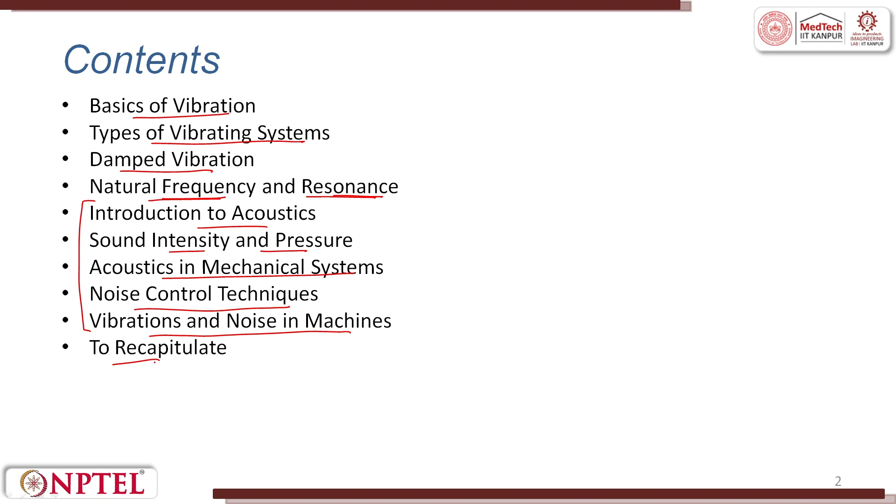First question is, what is vibration? Vibration is the repetitive oscillation of a mechanical system around an equilibrium point. There is an equilibrium point here, oscillation up and down. This is a sine wave that is showing the vibration. So, it is moving at a constant speed. It occurs when a system is displaced from its rest position and experiences a restoring force that tries to return it to that position, resulting in to and fro motion.

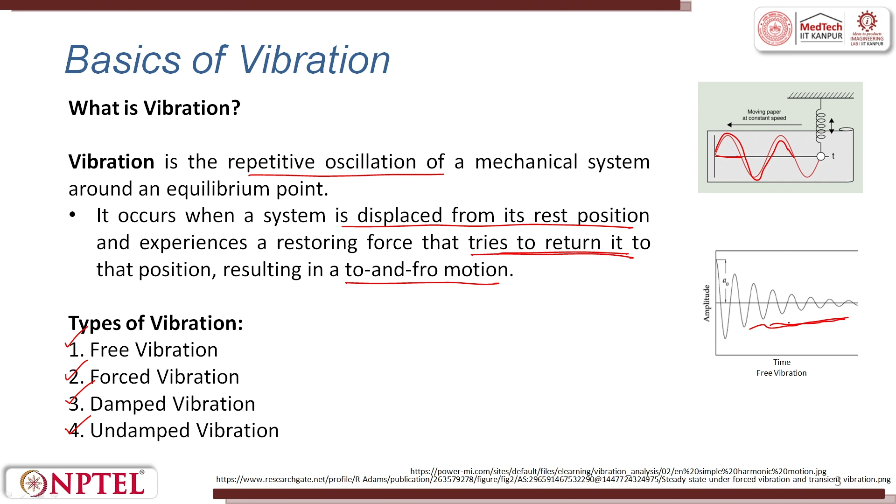Types of vibration are free vibration, forced vibration, damped vibration and undamped vibration. Let us go through these. First is free vibration. Free vibration occurs when a system is displaced from its equilibrium position and allowed to oscillate without external forces acting on it. Like a kid riding a swing: once the push is made, after that it is trying to come to its equilibrium position by itself. So, this is a free vibration. Slowly you see it is coming to an equilibrium position.

Then comes forced vibration. Forced vibration is when an external force continuously drives the system, causing it to vibrate at the frequency of the applied force. For example, when you ride a bike or drive a car, you experience some vibration because the engine is continuously acting as an external force driving the system. We can also take the example of a washing machine. It is continuously vibrating because a motor is rotating through electrical energy. So, this is forced vibration that could have varying amplitude, depending upon the load.

When the washing machine is running at maximum speed, the spin rating, it will be high, it could come down, it could again go higher, down, something like that. This is forced vibration. It depends upon the external force. The intensity given by the external force determines its amplitude.

Then is damped vibration. Damped vibration involves energy dissipation. Slowly energy is getting dissipated through friction or other resistive forces, gradually reducing the amplitude of oscillation over time. So, this is a damping material. The vibration is happening on the constraining layer. Damping material is helping to restrict the force. So, in this figure, the vibration is being damped from the maximum to almost the equilibrium.

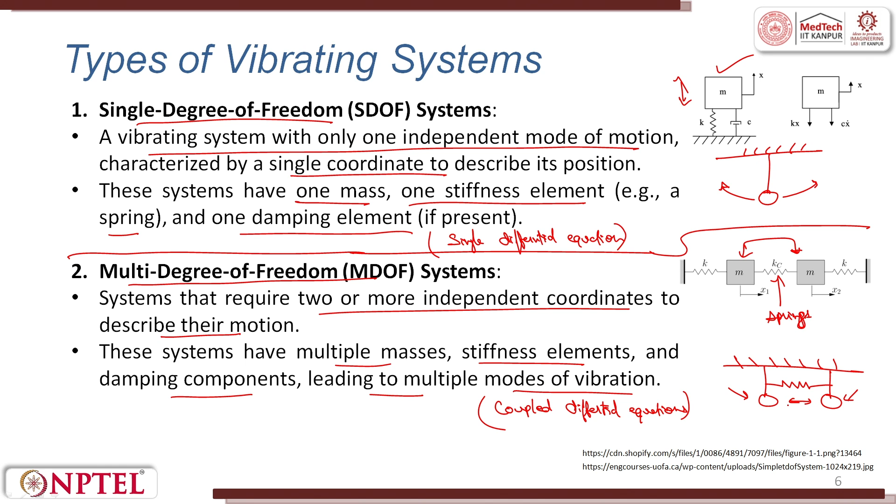If I give an example of a pendulum, a simple pendulum with one body swinging, that is a single degree of freedom. In multi degree of freedom, it has two pendulums, suppose, which are connected to each other using a spring. So, this becomes a multi degree of freedom, where motion of one pendulum is affecting the motion of the other pendulum.

What is damped vibration? Explanation of damping in mechanical systems. Damping refers to the mechanism through which energy is gradually lost from a vibrating system, leading to a reduction in amplitude of vibration over time. It occurs due to resistive forces like friction or material deformation, which convert mechanical energy into heat or other forms of energy.

This is a law of motion. The perpetual motion is not possible. So, this damping prevents perpetual motion. In theory or in notes, these could exist, but in real systems, perpetual motion is not possible.

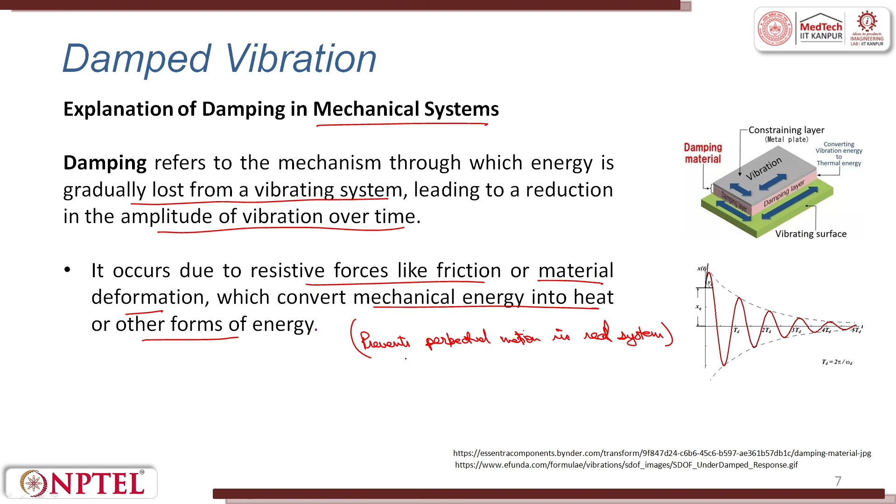Types of damping, if I try to talk about, it could be viscous damping or dry friction damping or Coulomb damping. It could also be structural or hysteresis damping. Viscous damping is caused by fluid's resistance, for example, oil or air, to the motion of vibrating system. The damping force is proportional to the velocity of the moving object. The common viscous damping example could be the shock absorbers.

You always get oil filled in your shock absorbers in your motorbikes, in your cars. That oil is there, that is a fluid that helps to absorb the shock and try to dampen the motion. So, I would put an example as shock absorbers in automotive systems.

Then comes dry friction damping, when it occurs between two surfaces in contact that slide against each other. Damping forces remain constant regardless of velocity and act in opposite direction to the motion. So that occurs when sliding motion is there. Sliding motion, if I try to talk about again your automotive system, brakes, the brake shoes, when they get in contact with the brake drum, the sliding motion is getting stopped. So that is a dry friction without having any fluid.

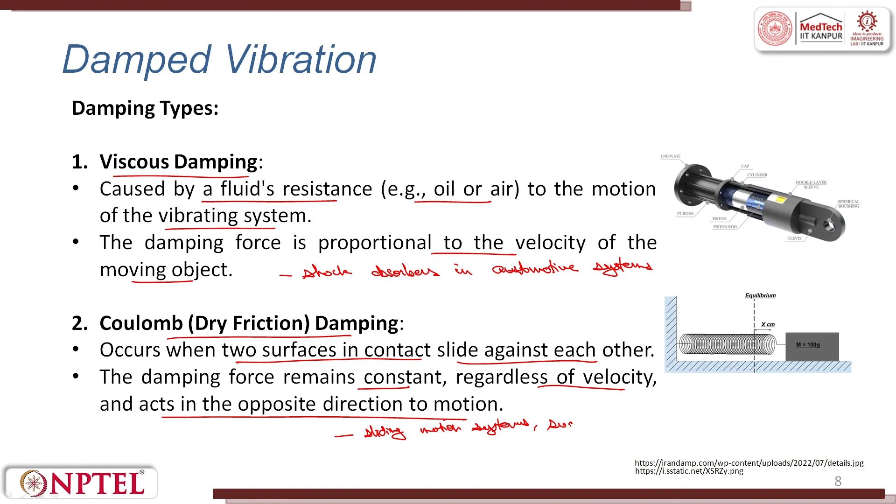I will put it as sliding motion systems such as brakes. Then comes structural or hysteresis damping. This arises from internal friction within a material as it deforms and returns to its original shape. This type of damping is dependent on the strain experienced by the material.

So these kinds of damping are majorly found in metal structures or in beams or machine frames, where vibration is absorbed by the material deformation only. When material is getting deformed, the frame is getting deformed, the vibration is absorbed here.

This damping is because of the vibration getting absorbed by the material deformation.

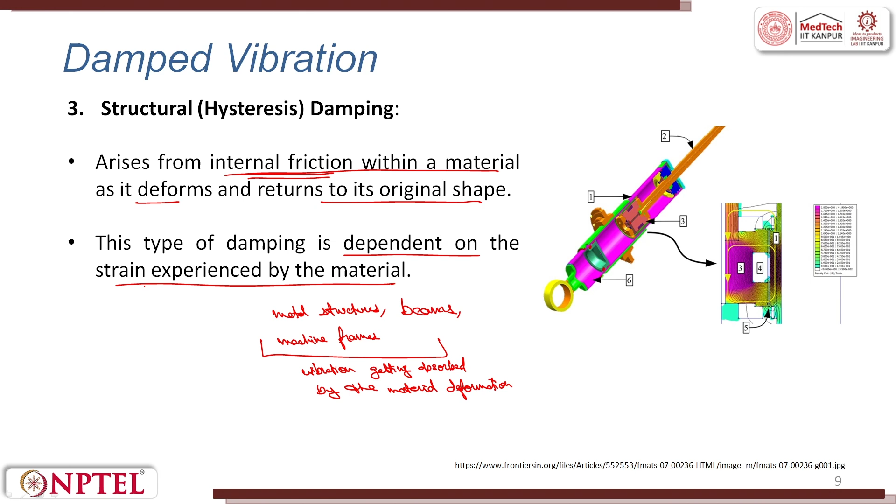It depends upon the strain that is being experienced by the material. Let us now talk about natural frequency and resonance. Natural frequency is the rate at which a system oscillates when disturbed from its equilibrium position without external forces acting

on it. Natural frequency, if I put certain examples: you put a child on a swing and you try to push the child, the swing goes higher and it goes faster. This is because you are matching the swing's natural frequency. For example, the guitar, how does it operate? Different strings in the guitar give you different pitch.

The pitch could be high, pitch could be low depending upon the thickness of the string of the guitar. When a guitarist pulls that string, you hear a sound that has a lower pitch if it is thick. If the thickness is lower, you hear a high pitch, because the natural frequency of the material of that string is what gives you that pitch.

So natural frequency depends upon the system's mass and stiffness. The more stiff the string of the guitar is, the higher the pitch. Less stiff, lower pitch. So stiffness is one factor, system mass is another factor, and each system has one or more natural frequencies based upon its structure.

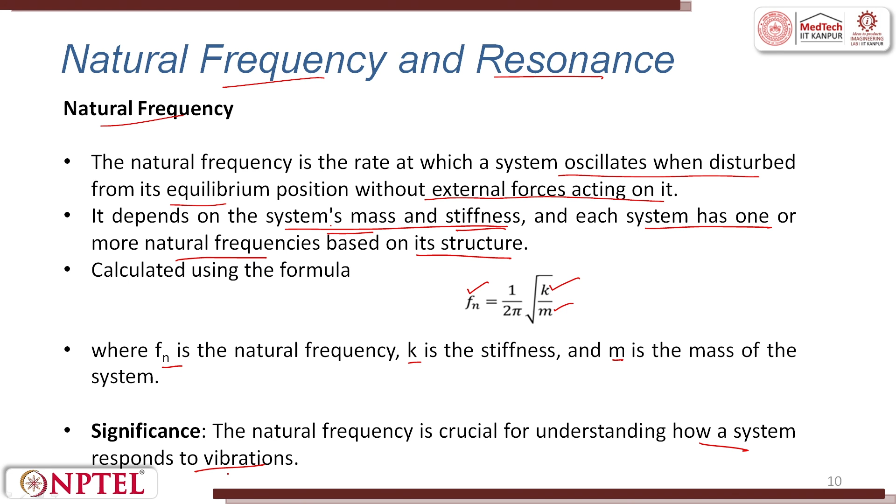It is calculated using the formula Fn, that is natural frequency, is equal to 1 by 2 pi root of k by m, where k is stiffness and m is mass of the system. Significance: natural frequency is crucial for understanding how a system responds to vibration. It is important to understand how operating a machine close to natural frequency can lead to resonance, making this concept more important in design. So for that, let us come to the concept of resonance.

Resonance occurs when an external force or input frequency matches the system's natural frequency, causing a significant increase in vibration amplitude. Taking the example, a guitarist could break a glass because the glass has a natural frequency. When the sound the guitarist is producing matches that natural frequency, the glass could shatter.

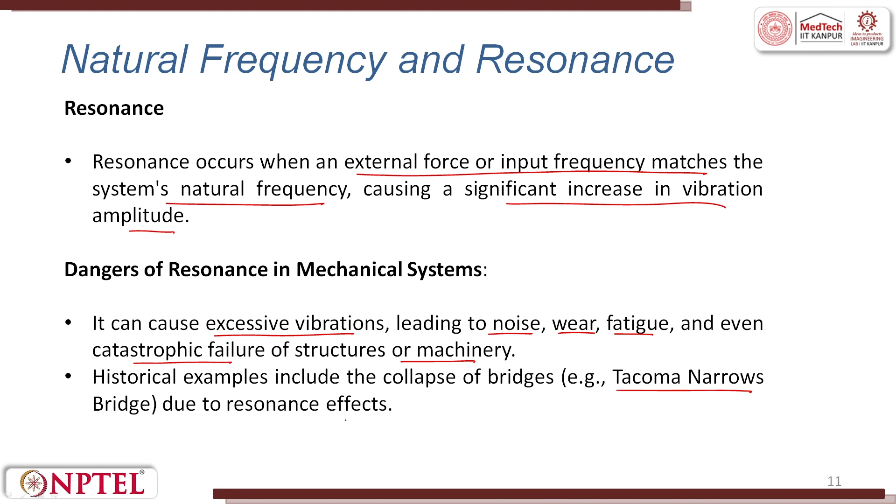That is, when a sound wave strikes an object and that frequency happens to match the resonant frequency of the object, resonance occurs. So there are certain dangers associated with resonance. It can cause excessive vibrations leading to noise, wear, fatigue, and even catastrophic failure of structures or machinery. Historical examples include collapse of bridges, for example, the Tacoma Narrows Bridge, due to resonance effects.

Now let us talk about acoustics. Basic principles of sound waves and acoustics. Acoustics is the branch of physics that deals with the study of sound waves and how they are generated, propagated and perceived. Sound is a mechanical wave that travels through a medium, which could be solid, liquid or gas, due to the vibration of particles in the medium.

Sound waves could be longitudinal and transverse. Longitudinal waves: in these waves the particles of the medium vibrate parallel to the direction of the wave propagation. Sound waves in air are longitudinal waves where areas of compression and rarefaction move in the direction of the wave. Transverse waves: in transverse waves the particles vibrate perpendicular to the direction of the wave propagation.

So, this is a transverse wave where peak and trough are being produced here with a specific pitch. In the longitudinal wave, it is moving in the direction of the wave propagation only. It is a longitudinal or compressive wave. While sound in gases and liquids primarily travels as longitudinal waves, it can propagate as transverse waves in solids.

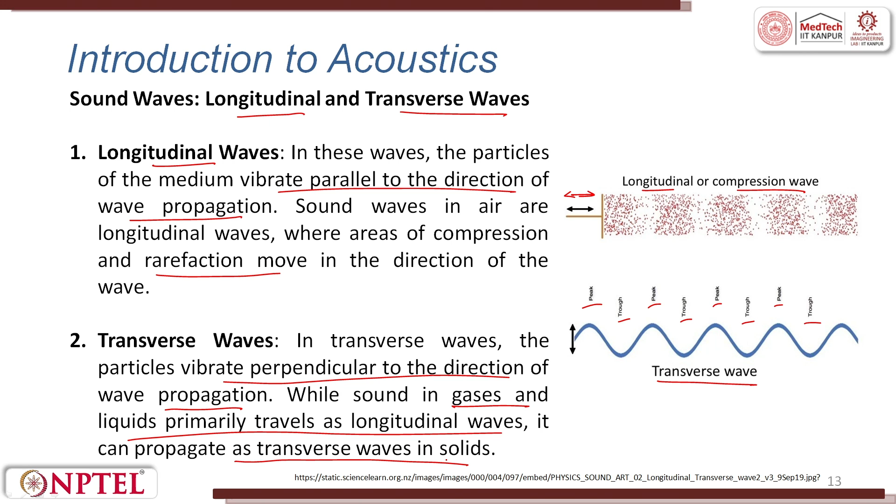Explanation of sound intensity and pressure levels. Sound intensity I. Sound intensity refers to the amount of energy passing through a unit area per second, and it is given in watts per square meter. It is a measure of power carried by sound waves and is perceived as the loudness of the sound. So, intensity means loudness.

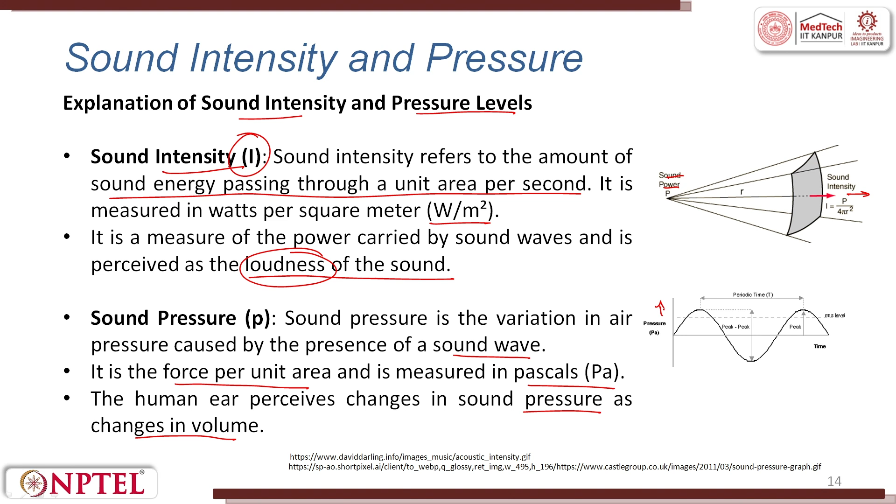Sound pressure. Sound pressure is the variation in air pressure caused by the presence of a sound wave. This force per unit area is measured in pascals. The human ear perceives changes in sound pressure as changes in volume. So, this is showing sound power, that is sound intensity, and this is sound pressure being shown in pascals.

If I try to put a mathematical relationship between sound intensity and pressure, it could be put this way. The intensity of a sound wave is directly related to the square of the sound pressure. The formula of this relationship is I is equal to P squared by rho C.

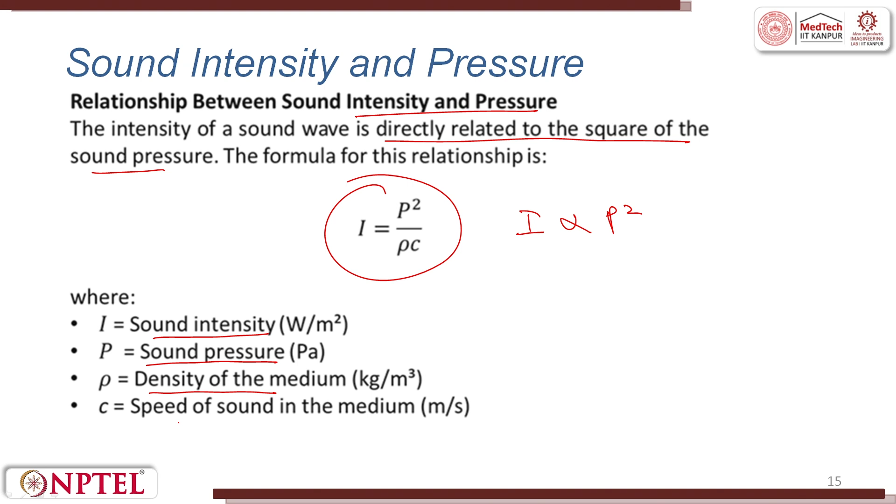So, here it is directly related, that means I is proportional to P square, where I is sound intensity in watts per meter square, P is sound pressure in Pascal, rho is density of the medium in kilograms per meter cube, C is speed of sound in the medium, that is in meter per second.

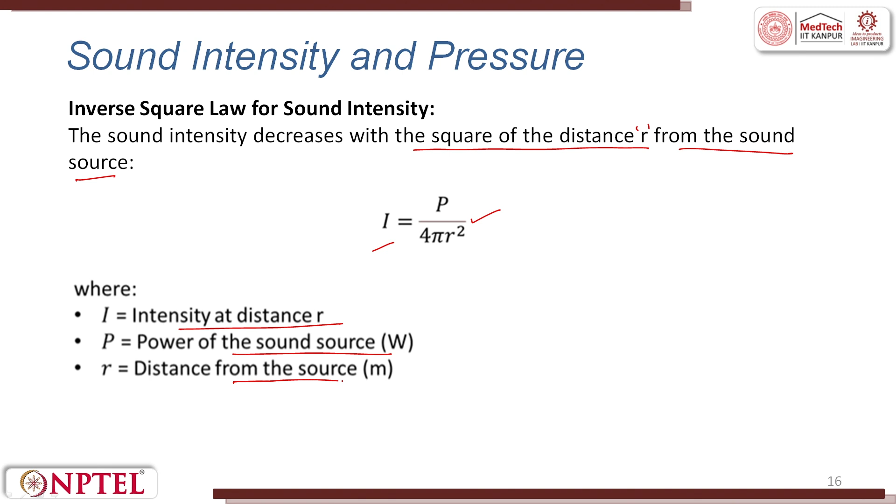Also, there is inverse square law for sound intensity, in which it is said that I is equal to P by 4 pi r square, that is sound intensity decreases with the square of the distance r from the sound source, where I is intensity at distance r, P is power of the sound in watts, r is distance from the source in meters. Now, how do mechanical vibrations produce sound?

Mechanical vibrations generate sound when an object oscillates, causing surrounding air molecules to move. So, there is an equilibrium point from which the amplitude and pitch or wavelength could vary. These vibrations create pressure waves in the air, which our ears perceive as sound. When a mechanical system vibrates, the motion transfers energy to the air, resulting in alternating regions of compression and rarefaction that propagate as sound waves.

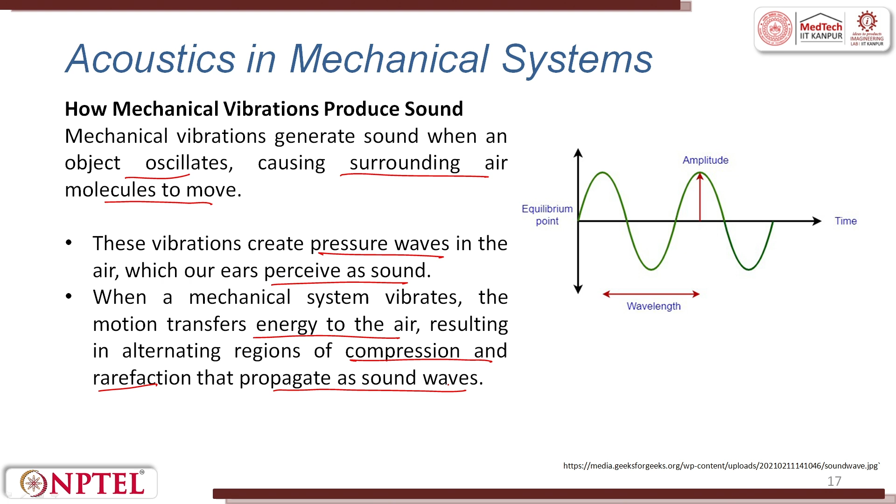Effects of vibration could be put in this way: in engines, in machines, in buildings. In internal combustion engines, vibrations from moving parts such as pistons, crankshaft and valves generate sound. These vibrations combined with combustion events produce noise that is typical of engine operation. In machines, vibrations in rotating machinery such as gearboxes, pumps, compressors lead to noise generation. This noise is often a result of imbalanced rotating parts or worn bearings or loose components.

It is there in machines, in buildings as well, in construction or in structural systems. Structural vibrations in buildings can cause noise, especially in cases of heavy machinery operation, elevator movements or wind induced oscillations. These vibrations transmit through walls, floors or other structural elements, leading to acoustic disturbances.

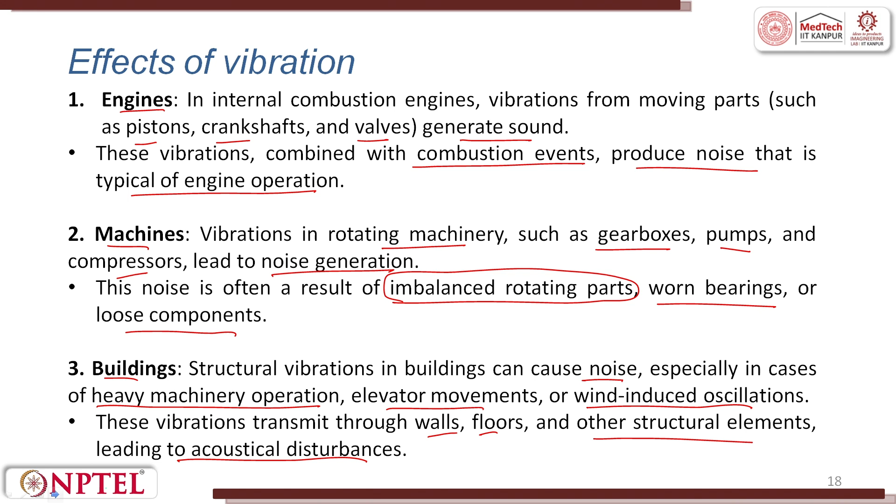Now the point is, how do we curb the vibrations? How do we control the vibrations? Because something that is happening in my neighborhood should not affect me. We close the door. This is a studio where recording is happening. We have acoustic material all around so that the vibration is not there. So vibration damping systems are there. Noise control techniques. Methods for controlling noise in mechanical systems: sound barriers, sound absorbers, damping materials, active noise control. These could all be used.

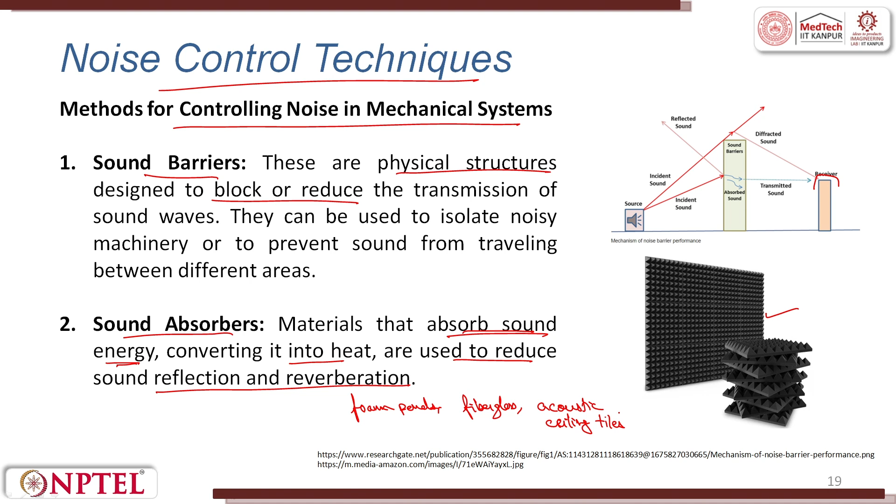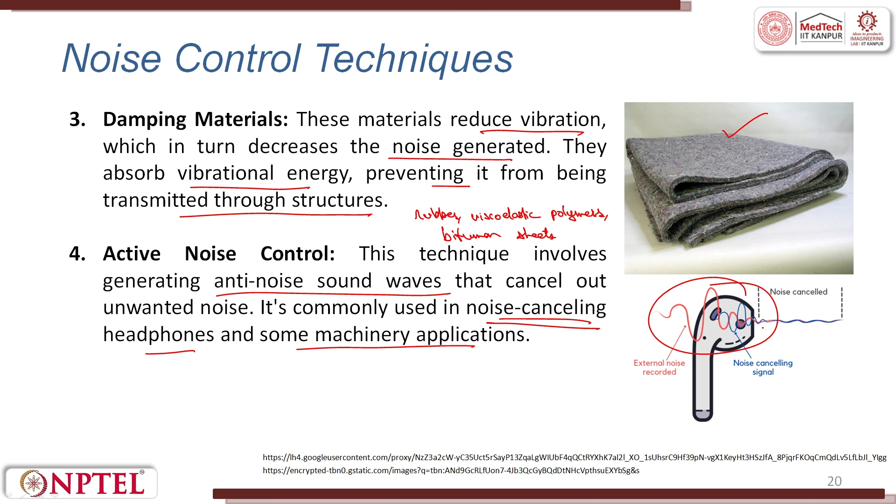Active noise control. This technique involves generating anti-noise sound waves that cancel out unwanted noise. It is commonly used in noise cancelling headphones and some machinery applications. So this is noise cancellation. So if you purchase Apple AirPods nowadays, those have a noise cancellation feature in them. That means whatever sound you wish to hear, that is fine. If from outside or the external environment some noise is coming, it will try to cancel that noise within the system. So this is noise being cancelled. That is, it generates anti-noise sound waves to cancel the noise.

So certain practical noise control techniques could be having industrial enclosures, which is an encasing of loud machinery in soundproof barriers to minimize noise in factories. You might have observed in a manufacturing facility, if a water jet machine is there, water produces a loud noise because of the stream of the pressure of the water.

So this machinery is put in a soundproof barrier to minimize the noise in factories. In the automotive industry, damping sheets are used in car bodies to reduce road and engine noise. In building construction, sound absorbing panels are installed in walls and ceilings to control noise in commercial and residential spaces.

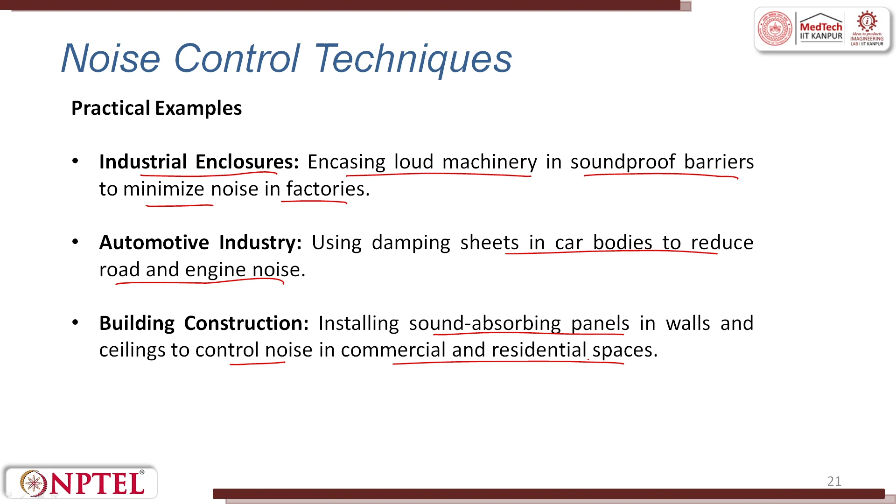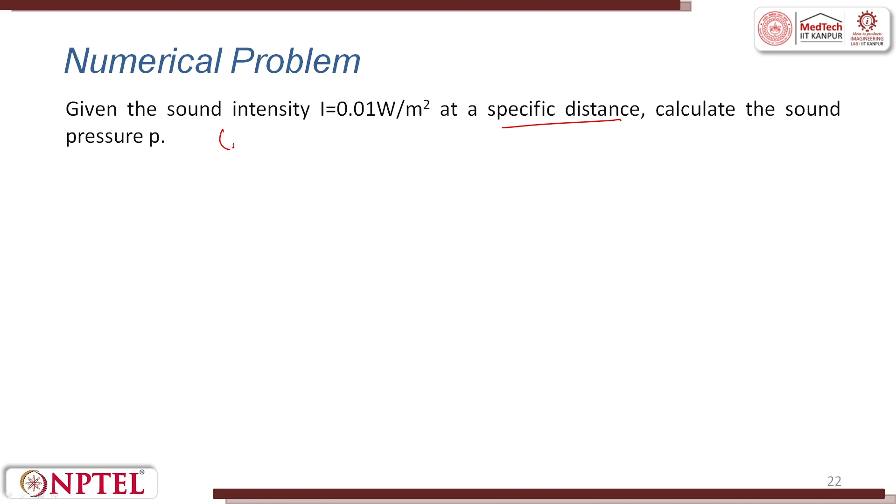So there is a small numerical. Given a sound intensity I = 0.01 W/m² at a specific distance, calculate the sound pressure P. What we are given is only I, and let us assume that this is happening in air. For air, the density is typically 1.21 kg/m³, taking the density of air at 20 °C, and the speed of sound in air is 343 m/s. I have been given intensity, 0.01 W/m². I need to find the sound pressure P.

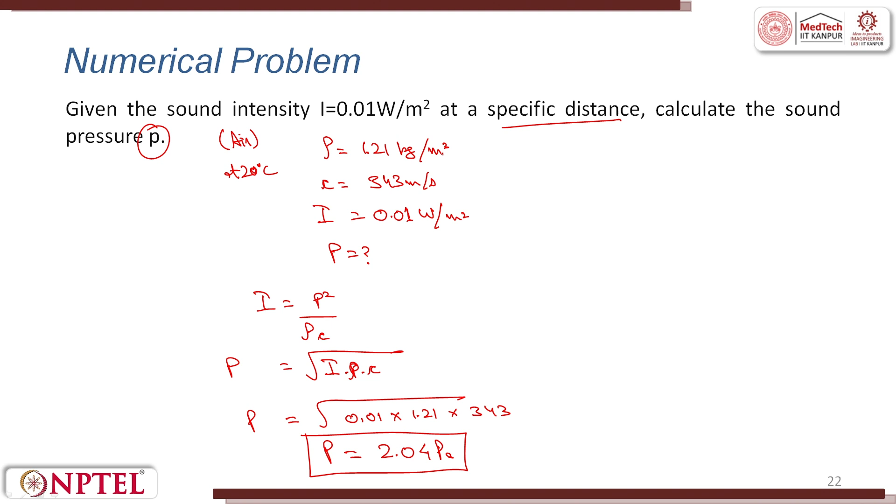As we know, I = P²/(ρc). Therefore, P = √(I·ρ·c). Substituting the values, this is √(0.01 × 1.21 × 343), and I got P = 2.04 Pascal. This was a very short numerical just to give a brief understanding of how we calculate the sound pressure for a specific medium. For air at 20 degrees, the values of ρ and c were taken.

Next is vibration and noise in machines. Vibrations in machinery occur when mechanical components oscillate due to forces acting on them. These vibrations can generate noise as vibrating parts cause surrounding air to move, producing sound waves. The intensity and frequency of the noise depend on the amplitude and frequency of vibrations. Techniques to mitigate vibrations and noise could be damping,

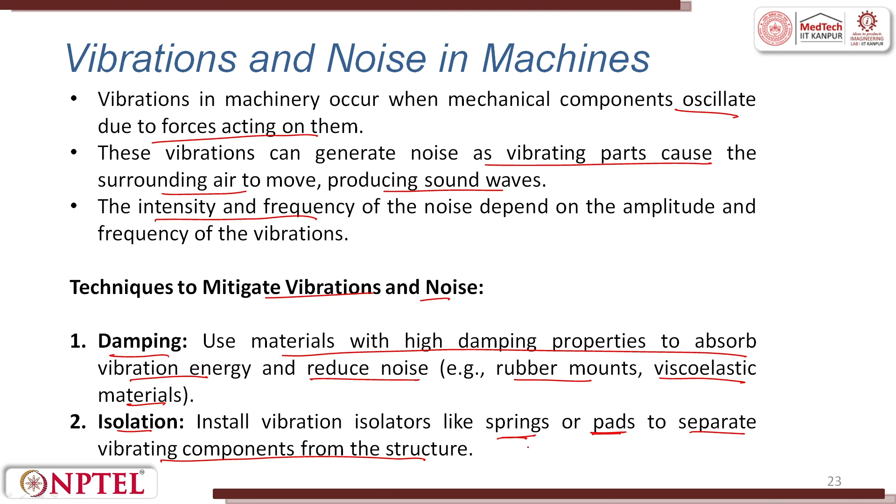isolation, balancing, stiffening, maintenance. Because we are talking about machine elements, use of material with high damping properties to absorb vibration energy and reduce noise is an important factor. For example, rubber mounts and viscoelastic materials all act as damping materials. Isolation: install vibration isolators like springs and pads to separate vibrating components from the structure. A vibrating component could be put as a separate setup, padded or mounted on springs, so that the vibration does not transfer to the main machinery.

The next is balancing, that is, properly balance rotating parts to minimize vibrations caused by uneven mass distribution. For example, if a motor is rotating at an angle of 2 degrees, this becomes imbalanced. This will produce more vibration than a motor that is at exactly 0 degrees.

Stiffening: increase stiffness of machine parts to reduce resonance and vibration amplitude. A regular preventive maintenance schedule has to be there. If temporary joints, that is nuts, bolts and screws, are getting loosened, those are to be tightened. So stiffening of machine parts is also important. Maintenance: regularly check and maintain machinery to prevent excessive vibrations due to worn out or misaligned components. These methods help control vibrations and reduce noise levels, ensuring smoother operation and longer equipment life.

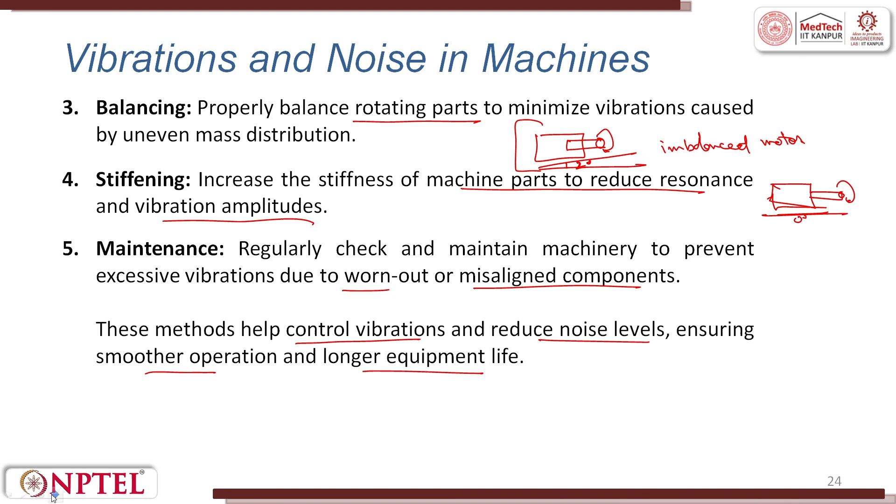With this, I am closing my lecture on vibrations. Just to recapitulate, the questions that could be asked are: What is the difference between free and forced vibration in mechanical systems? Explain the concept of damping. How does it affect the behavior of a vibrating system? While explaining damping, give some examples and compare metals with soft materials. How does damping happen through them? What is resonance and why can it be dangerous in mechanical systems? I have quoted some examples; you can take more examples and try to answer this question.

Define natural frequency. How does it relate to the stability of a system under vibration? What are the basic types of sound waves and how do they propagate through different mediums? How can vibrations in mechanical systems contribute to noise, and what are some techniques used to reduce vibration induced noise? Explain the significance of the wave equation in acoustics. How does it help in understanding sound propagation?

The references are taken from the internet. The sources of the figures I have taken are given in the slides.